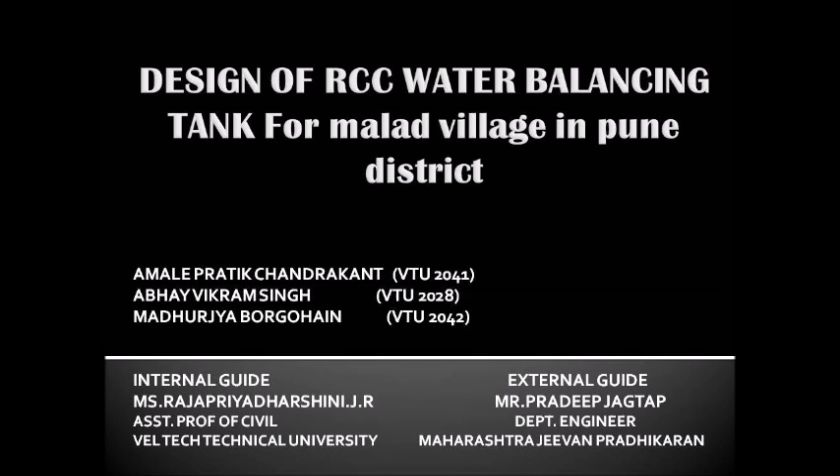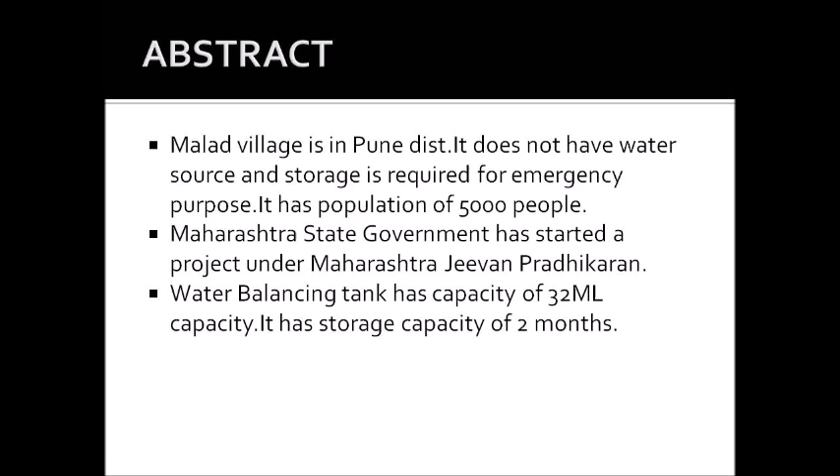The abstract of this project: Malad village is in Pune district and it does not have any source of water or any storage capacity tank. The population of this village is 5,000 and the Maharashtra state government has started this project under Maharashtra Jeevan Pradhikaran. The water balancing tank will have a capacity of 32 ML, with storage for 2 months. The purpose of this project is to provide the required amount of water to the people and store water in case of emergency.

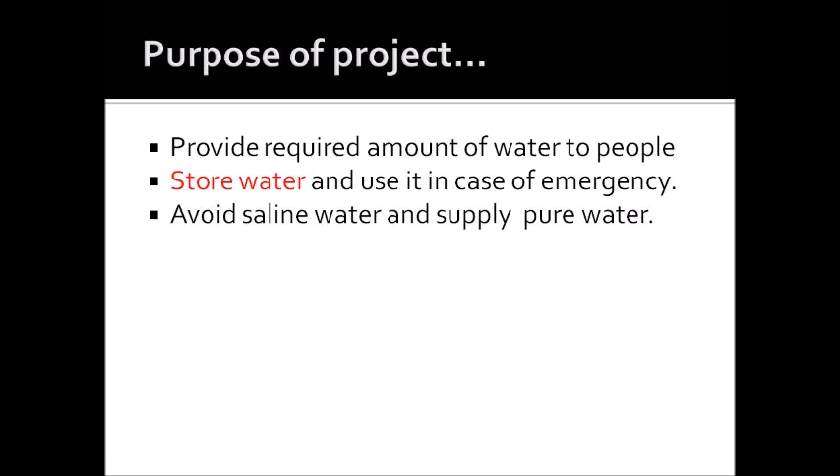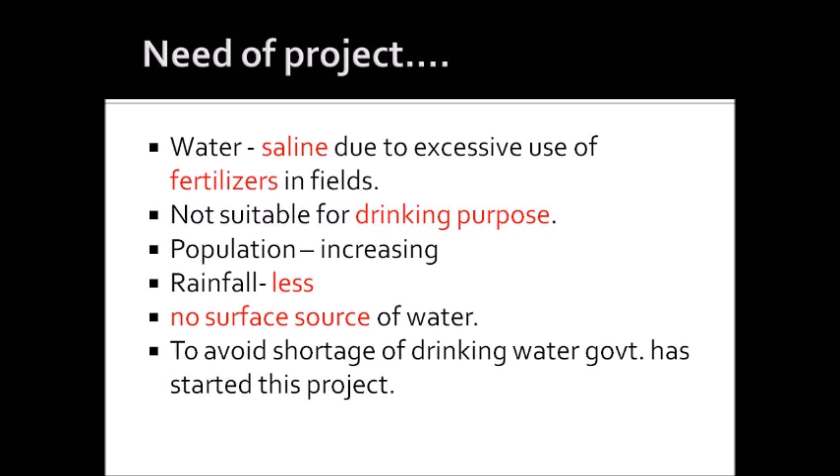The need of the project: the water available at that village is saline due to excessive use of fertilizers in the field, hence it is not useful for drinking purpose. The population is increasing day by day and the rainfall is less too, and surface source is not available there. Hence the project is required, and the government has started this project to avoid the shortage of drinking water. The canal gets dry in summer season, so there is no regular supply of water.

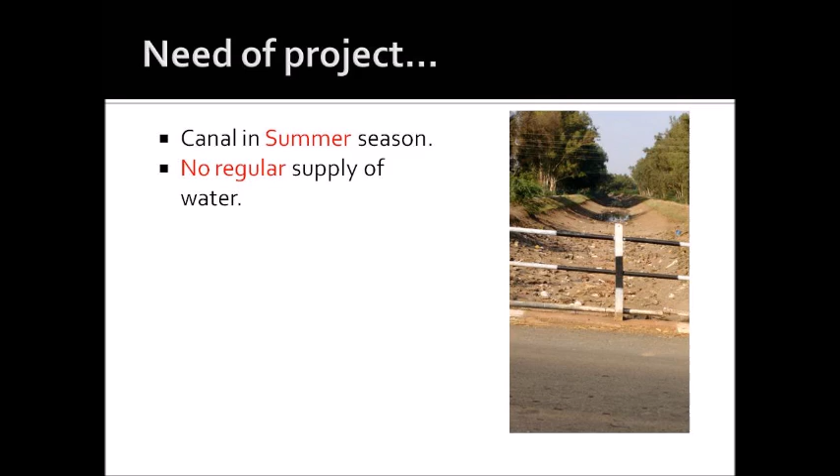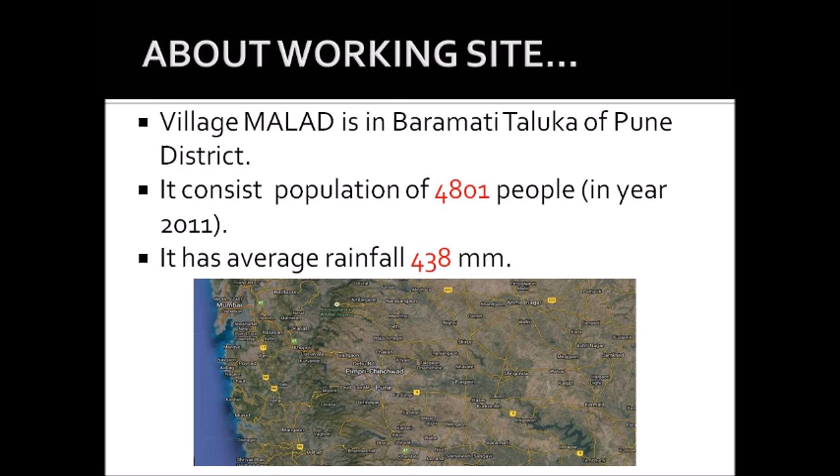About the working site: the village Malad is in Baramati Taluka of Pune district. It is around 120 km from Pune and has a population of 4801 people as per 2011 calculation. It has an average rainfall of 438 mm.

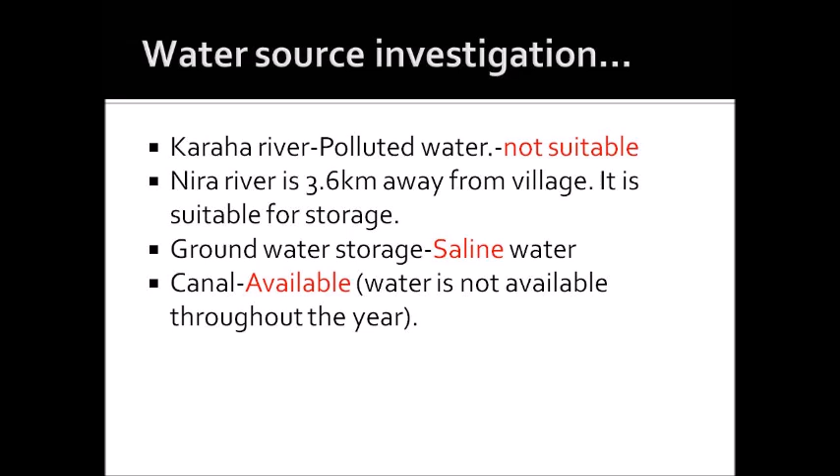The first step of this project is water source investigation. We found four sources: one is Karaha river, which is polluted, hence we cannot use it for drinking purpose. Another is Nira river, which is 3.6 km away from the village; it is suitable for storage, but the rainfall is very less, so we can't get water from Nira river throughout the year. Groundwater storage is available, but due to excessive use of fertilizers the water is saline, so we can't use it for drinking purpose. The canal is available, but water is not available throughout the year.

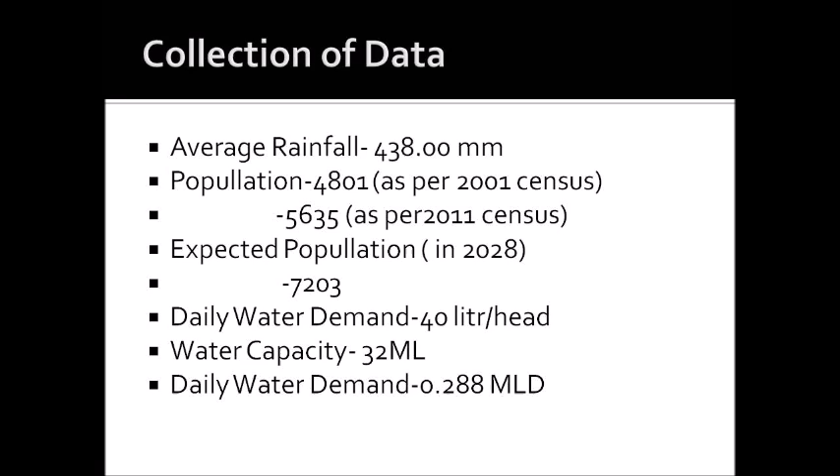Collection of data: the average rainfall is 438 mm. Population is 4801 as per 2001 census and 5635 as per 2011 census. The expected population in 2028 is 7203 people. Daily water demand is considered as 40 liters per head, and the water capacity of the storage tank will be 32 million liters. Daily water demand will be 0.288 million liters a day, and the supply of water will be for 2 months.

Proposed tank dimensions are in trapezoidal shape. The estimated cost of the tank with the pump house is 3 crore 26 lakhs 59400.

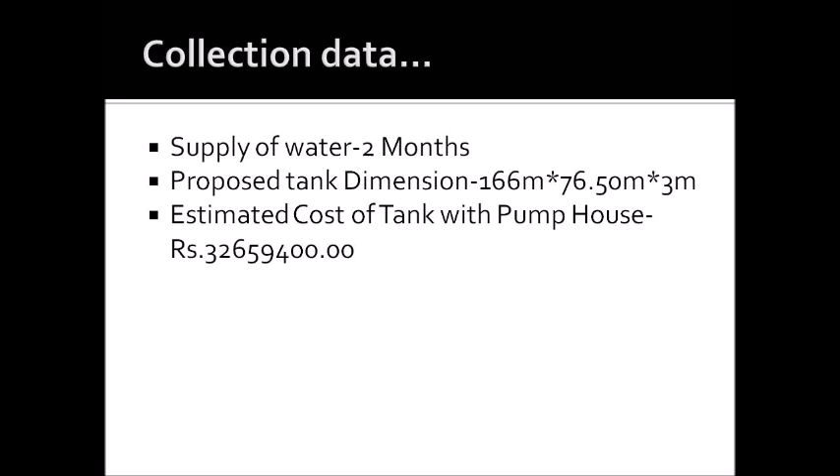The layout of the plan is shown in the next slide, and the dimensions of the tank are shown as A, B and C. A is 184 meters in length, B is 122 meters, C is 170 meters, and D is 53 meters.

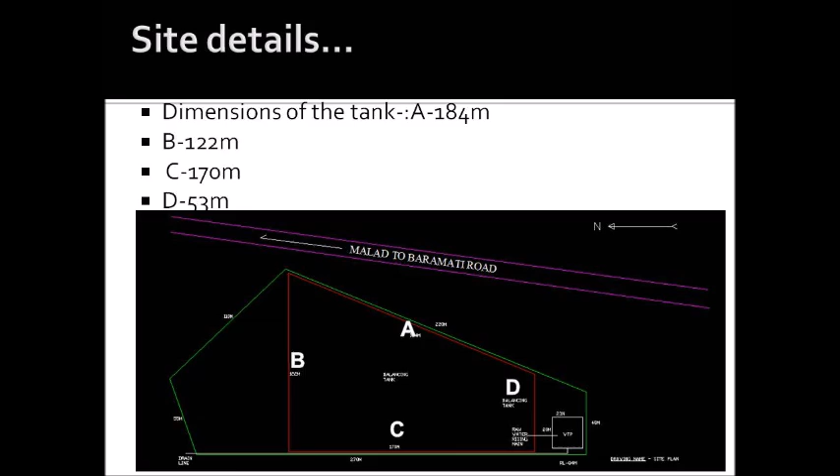The diagram shows the rough diagram of the footing wall, and the height of the wall is 4.15 meters. Thickness of the wall up to 1.9 meters is 650 mm, and thickness of the wall from 1.9 meters to 4.15 meters is 250 mm.

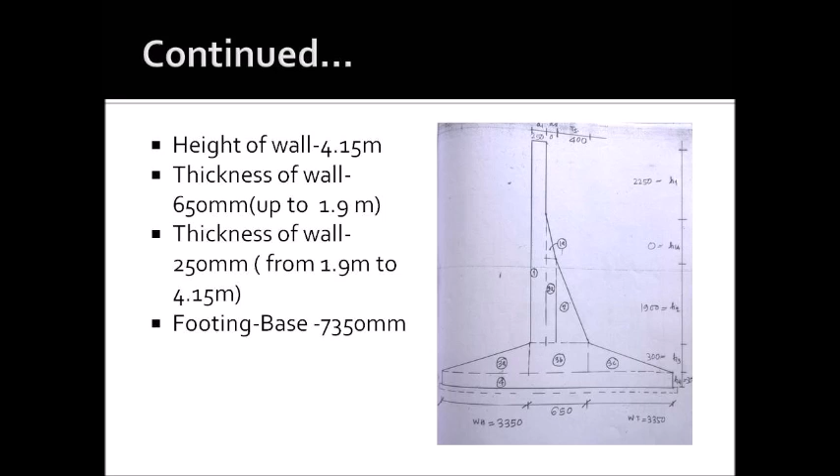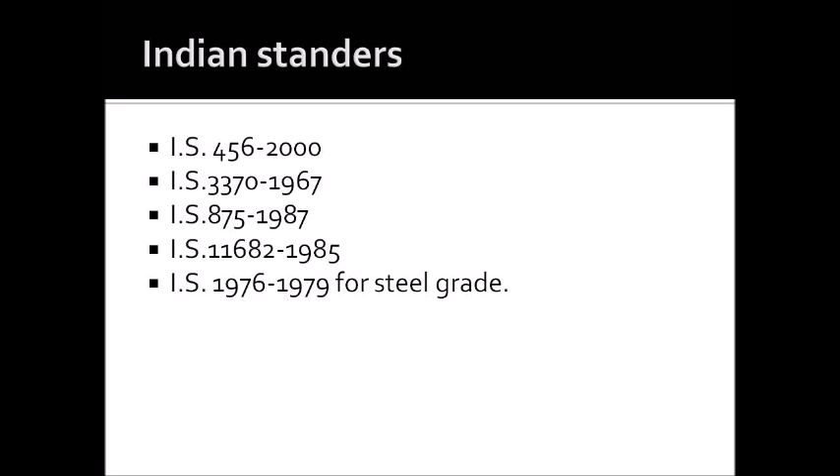The footing base is 7350 mm, and the Indian standard codes used are IS 456 2000, IS 3370 1967, IS 875 1987, IS 11682 1985, and IS 1976 1979 for steel grade.

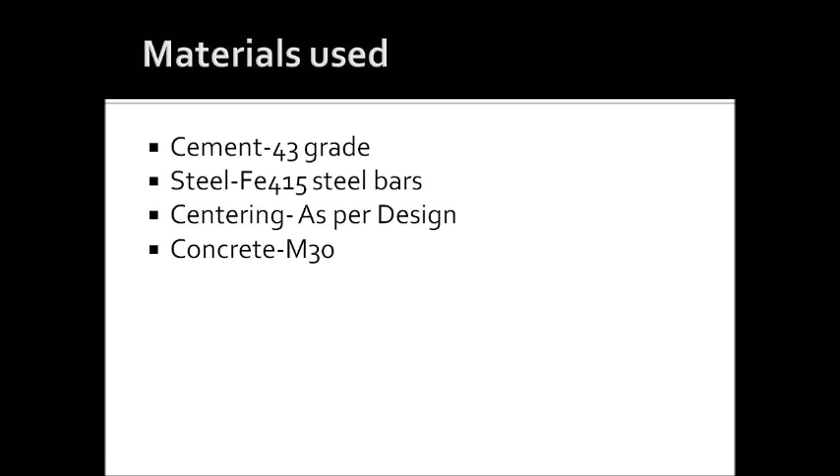The materials used are cement 43 grade, steel Fe415 steel bars, centering as per the design we have done, and concrete is M30. The design specifications are given.

The tank capacity calculation was done based on an expected storage of 2 months, with a daily demand of 0.37 million liters. Capacity required for 60 days is 22.20 MLD, and considering losses, it becomes 31.7 MLD. So the total capacity calculated is 32 million liters.

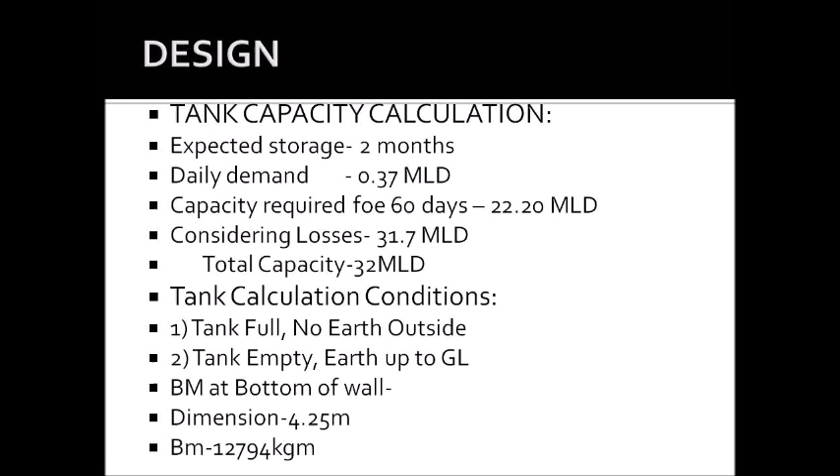The tank calculation conditions considered are: first, tank full with no earth outside; second, tank empty with earth up to ground level. The bending moment at the bottom of the wall and the dimension is 4.25 meters. The bending moment is calculated as 12794 kgm, and the Ast calculated is 16,302 cm².

Another condition is tank empty with earth full, where the height of earth is considered as 3.9 meters. The bending moment in this case is 4426.09 kgm.

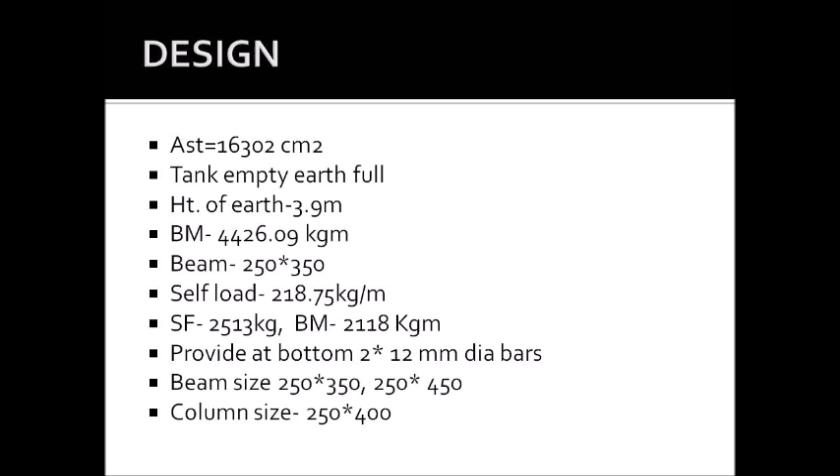The beam is designed as 250 by 350 mm, with a self-load of 218.75 kg per meter. The shear force is 2513 kg and bending moment is 2118 kgm. Bottom 12 mm dia bars are provided, and beam sizes will be 250 by 350 and 250 by 450. The column size is designed as 250 by 400.

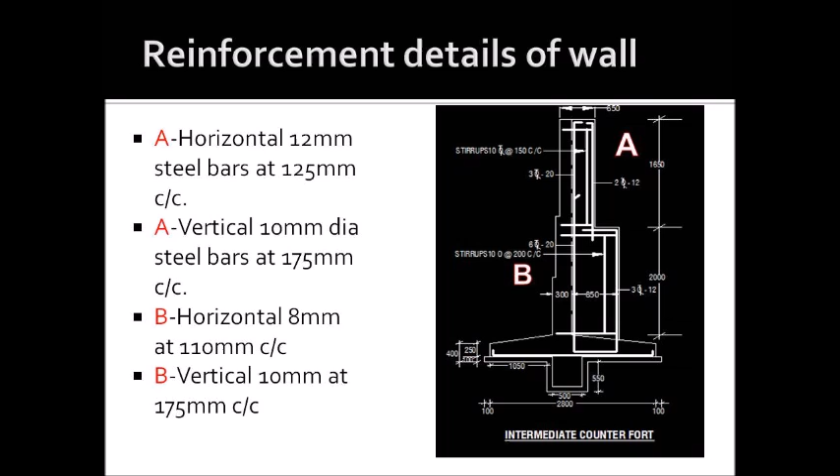The reinforcement details of the wall are shown in the diagram. Point A denotes horizontal 12 mm dia bars at 125 mm center-to-center spacing and vertical 10 mm dia bars at 175 mm center-to-center spacing. Point B denotes horizontal 8 mm dia bars at 110 mm center-to-center spacing and vertical 10 mm dia bars at 175 mm center-to-center spacing.

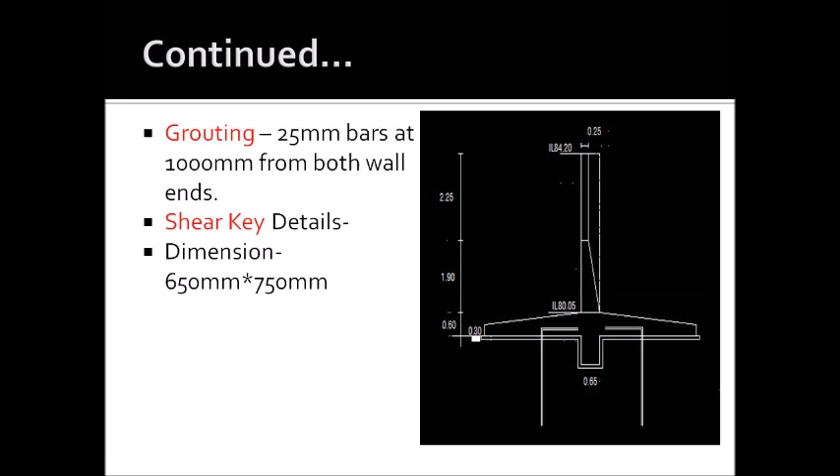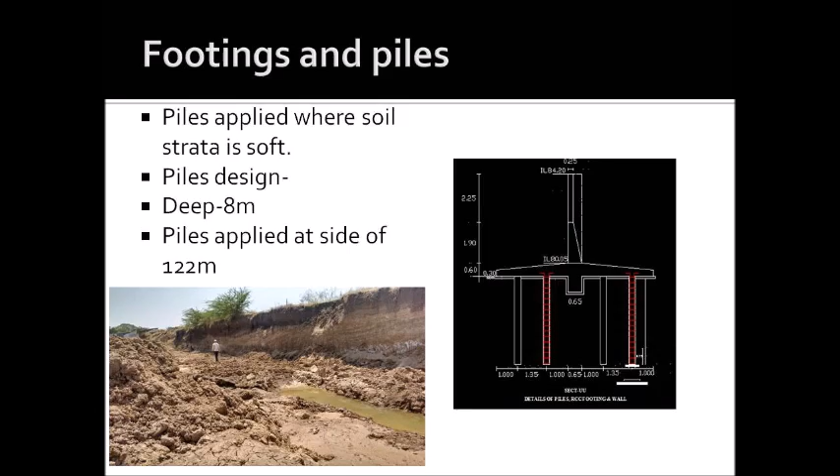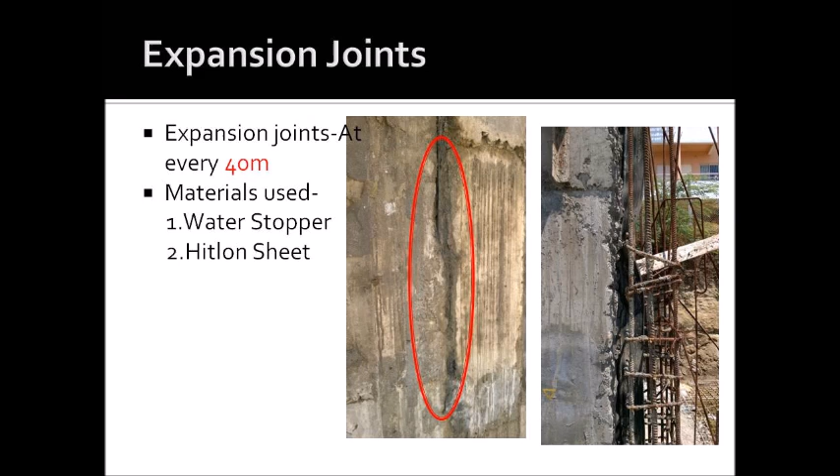Expansion joints are placed at every 40 meters, using a water stopper and a Hitlon sheet. In the first diagram, the red circle denotes the expansion joint, and in the second diagram, the black color represents the Hitlon sheet. Concreting and shuttering are done as per IS code.

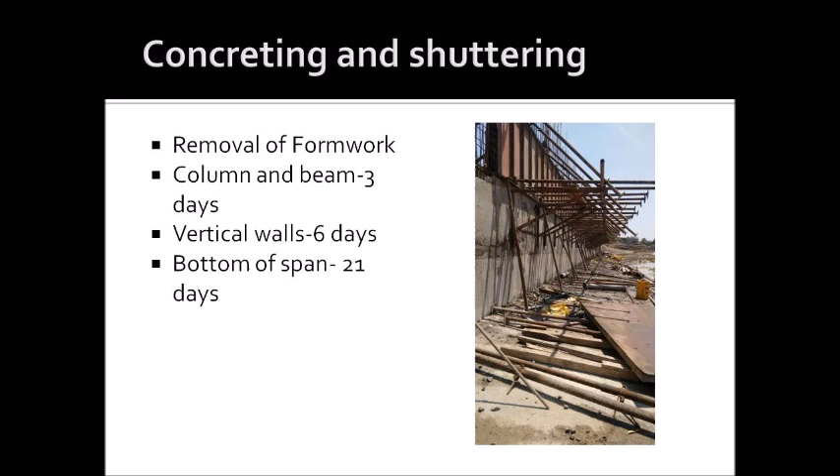The column and beam formwork will be kept for 3 days, vertical walls for 6 days, and the bottom of the span for 21 days. Site photos are shown in this slide. The next slide will cover the floor slab.

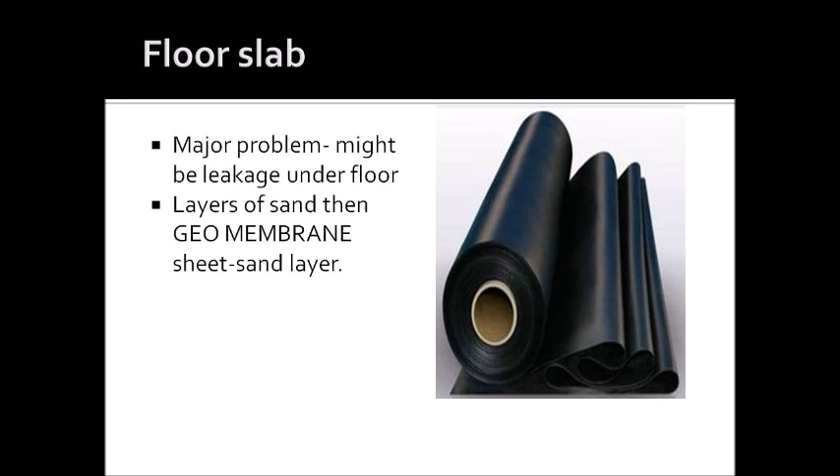The major problem faced is leakage under the floor, so geomembrane sheets are placed with the help of a sand layer. This helps avoid water leakage and reduces water losses.

Our work contribution is the design of the RCC water balancing tank and the use of geomembrane sheets on a large scale. We have even found a way to avoid leakage from the footing base by using geomembrane sheets.

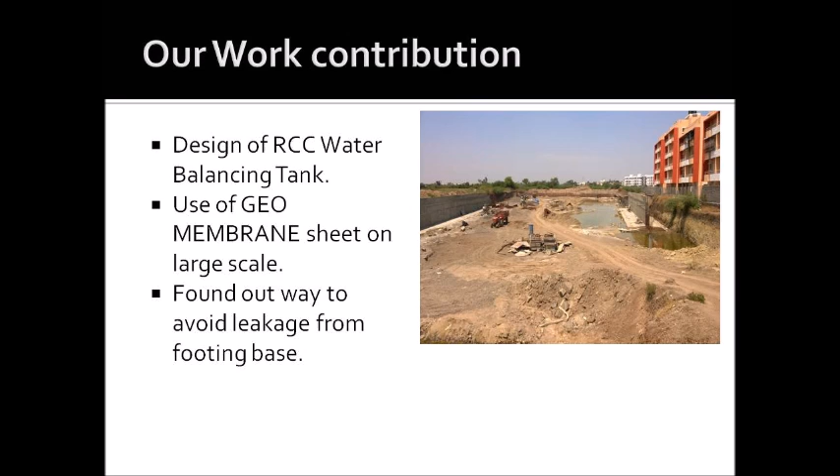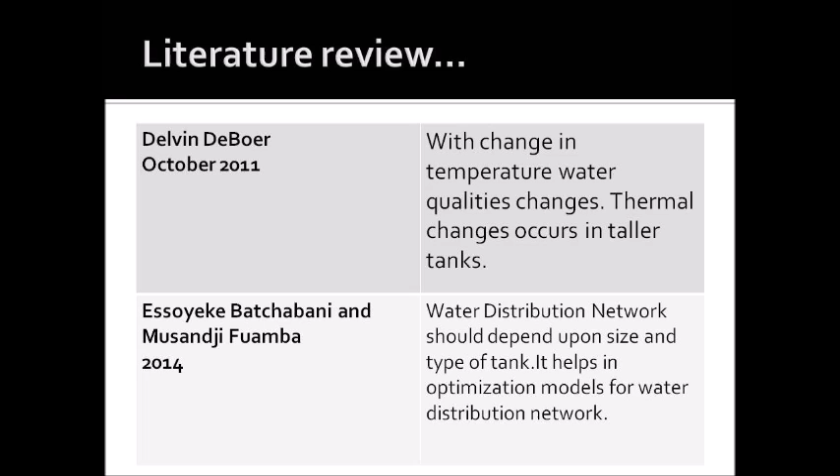The next literature review is from Essoyeke Batchabani and Musandji Fuamba, who studied that the water distribution network should depend upon the size of the tank, and it changes according to the type and size of the tank.